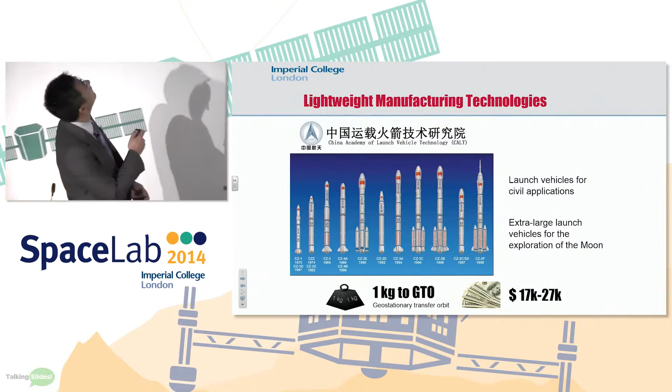Our research outputs are mainly applied to the aerospace and automotive industries. The China Academy of Launch Vehicle Technology is the biggest Chinese launch vehicle designer and manufacturer. We have had a long-term partnership with them for over 10 years.

CALT, the short name for China Academy of Launch Vehicle Technology, currently has a series of launch vehicles called the Long March series. It has 10 different models, and most of the products are used for commercial and civil applications.

As you probably know, the Chinese government has recently started a big plan to explore the moon, which means CALT has the mission to build extra-large launch vehicles. Currently, CALT's biggest launch vehicle has a diameter of 3.8 meters. For the future extra-large launch vehicle, the diameter will be over 8.5 meters.

You can imagine that from a manufacturing point of view, there will be some difficulties or issues. That's why they asked if we could help, and that's why we set up a long-term relationship.

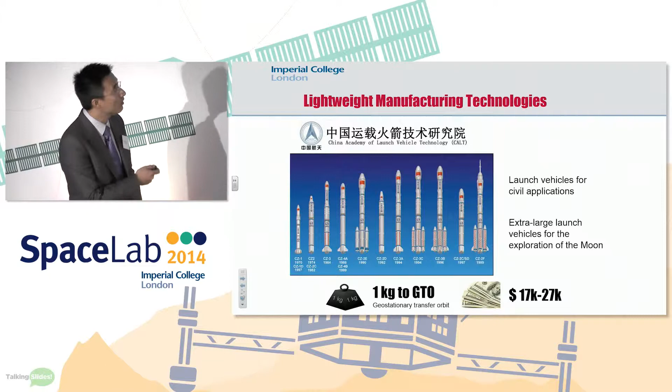In the aerospace industry, lightweighting is very important, because transferring 1 kilogram of weight into space costs about 17,000 to 27,000 US dollars, which is very expensive. From an economic point of view, lightweight manufacturing technologies will be critical for the aerospace industry.

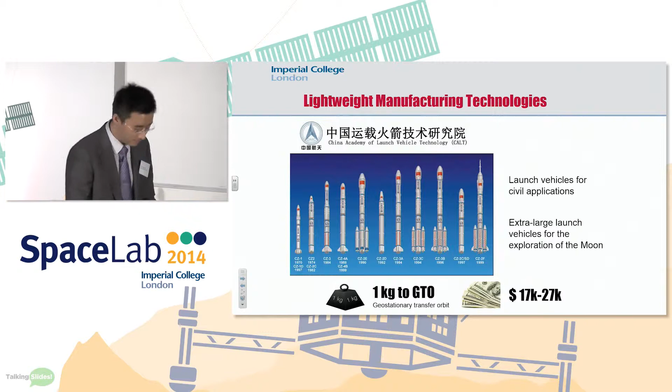Over the last 10 years, we have been working on different projects with CALT. Currently, over 50% of the structural components made by CALT are made from aluminum alloys, and the requirements for these components are lightweight, complex shape, and high strength.

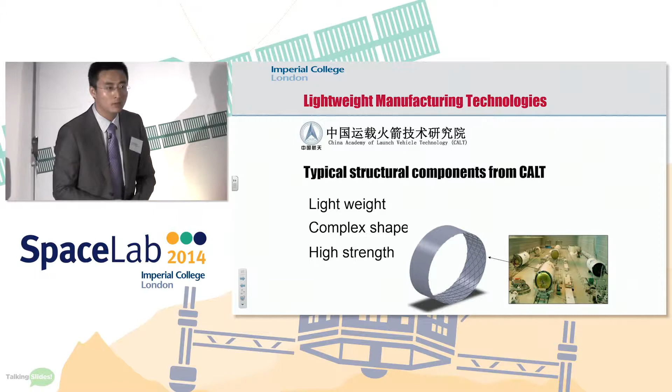We developed an advanced and novel manufacturing technology called creep age forming technology for them, now used to make the skin panels of the launch vehicle. However, this technology only uses a small, elastic deformation to make simple shaped components. If they want more complicated shaped components manufactured, we have to offer them something different.

We developed a novel forming technology called HFQ forming. So what is HFQ forming? The basic principles are shown here.

At the very beginning, we put an aluminum blank into the furnace to heat the material up to the solution heat treatment temperature. Then we transfer the material quickly from the hot furnace to a piece of cold die, which is normally water cooled.

We form the components very quickly using the cold die, and the formed component is held within the cold die for a certain period of time, normally a few seconds. Afterwards, we put the formed component into another furnace for artificial aging. By doing this, we can achieve the full strength of the material.

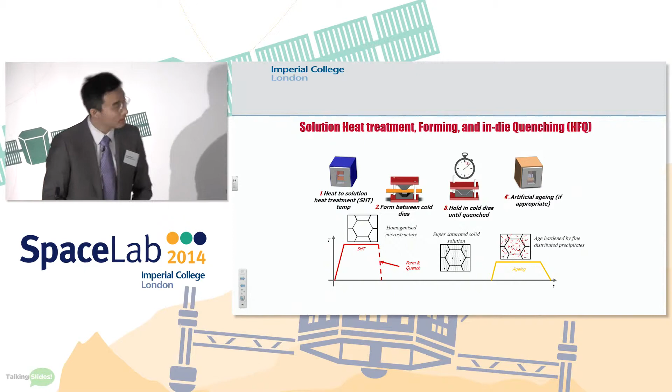This is a very novel forming technology that combines metal forming and heat treatment in one operation. Since we form the components at solution heat treatment temperature, the ductility of the material is very high, so we can form components with very complicated geometry.

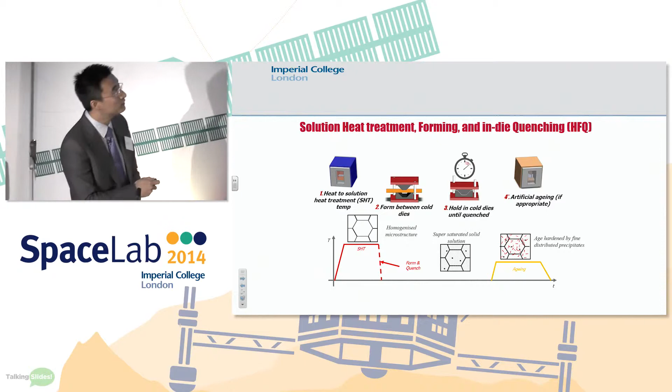Since we're quenching from the cold die, a supersaturated solid solution state is obtained after forming. After artificial aging, we can retain the full mechanical strength of the material.

This technology was invented at Imperial 10 years ago. Over the years, we have been studying it intensively, using it to form different alloys, including many different types of high-strength aluminum alloys.

This is a real component from Airbus. This component is called a wing stiffener.

Actually, it was made from CNC machining previously. They used a big block of material and used CNC machining to remove over 90% of the material away to make one component. So you can imagine the cost is very high. To make each one of these components will cost over $180.

So Airbus came to us the other day and asked if we can use a piece of sheet metal to form the components directly. This will be much cheaper. So we tried the material. They used AA2024, which is a very high-strength aluminum alloy. We used conventional metal forming technology. As expected, it failed.

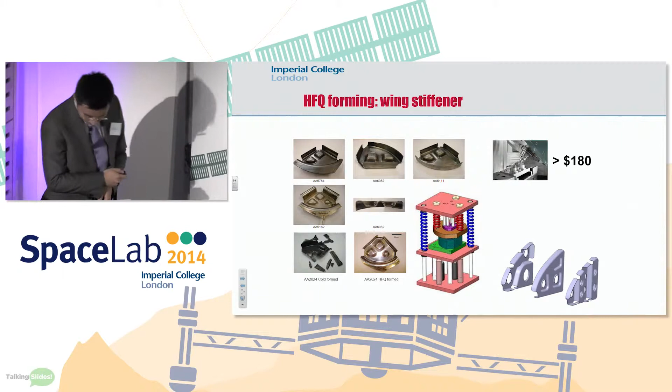And then we developed our own tool and formed it using our HFQ forming technology. It was very successful. And we tried different materials as well: 6082, 6111, 5000 series as well. They are all very successful. And in terms of cost, if we include the tooling cost as well, if we form the components using HFQ technology, the cost will be less than $10. So the cost saving is very obvious.

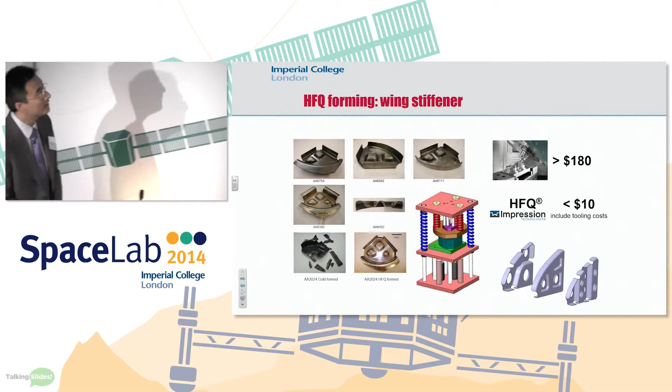We have another customer who came to us the other day asking if we can use 6000 series to form a very complicated shape, a real component. And they provided us the die, and we tried using their original material, which is in T6 condition. This is the maximum strength of this material.

And we developed our own tool in our lab, and we formed it using HFQ technology very successfully again. So the part is very complicated in shape. At room temperature, we can't form the part at all. And the repeatability of this technology has been verified.

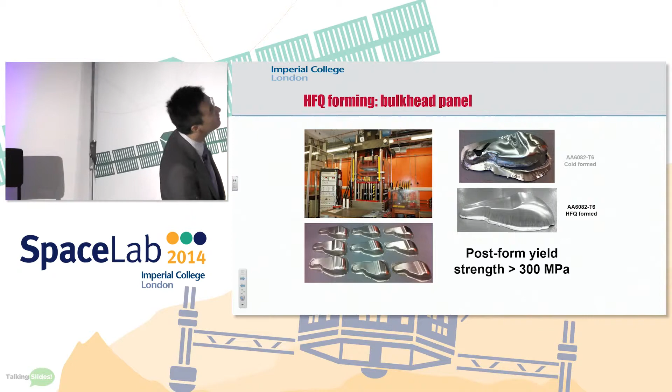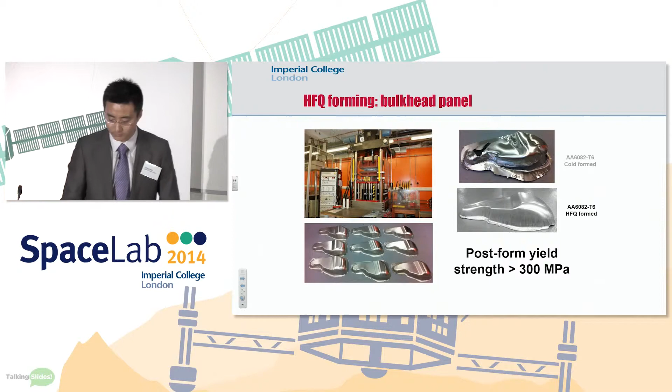This is very important, so we checked the post-form strength of our technology. We can achieve yield strength of over 300 megapascal, which is equivalent to the maximum strength of this material. This is very important for the customer because by using this kind of strength, they can save up to 50% compared to their original aluminum alloy components.

This technology cannot only be used for aluminum alloys. It can be used for magnesium alloys as well. As we probably know, magnesium alloy is probably the lightest metal which can be used to manufacture structural components. However, it's very brittle at room temperature, so it's not possible to form it that way.

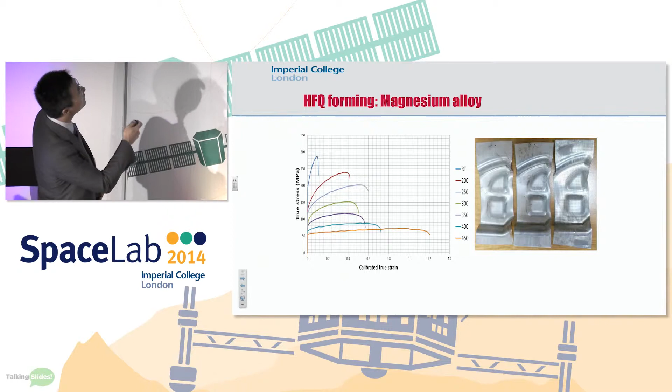At Imperial, we have the latest model of Gleeble, which is the most advanced material tester in the world. So we can simulate the complicated temperature evolution during the deformation process. Of course, we can simulate or reproduce the HFQ temperature evolution. We can see that, especially at room temperature, the ductility of the material is very, very poor. So it's not possible to form any shape by cold forming or traditional metal forming technologies. But if we look at this curve, which is the HFQ forming condition, the ductility has increased significantly. So we use this forming condition to form the part very successfully.

All the previous results introduced by myself were realized at lab scale. What if we apply this technology in an industrial production line? What will happen?

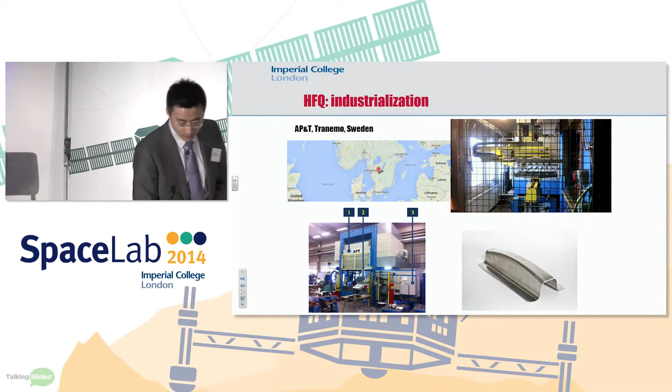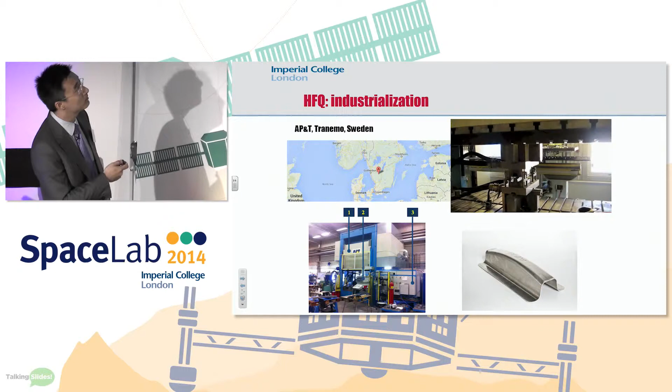Actually, a few years ago, we went to Sweden, to AP&T, and we realized our technology in a real existing production line. This video shows a speed feeder taking the specimen out of a furnace and putting it onto the die, forming it very quickly, and holding it within the cold die for a few seconds, and the part was formed very successfully.

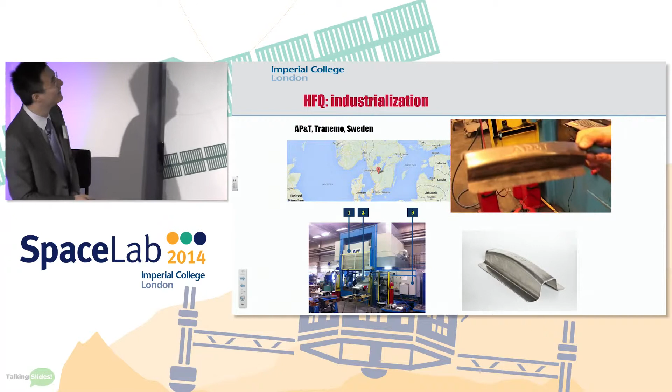They put a very nice logo here, AP&T. And this is the production line, a small-scale production line of AP&T.

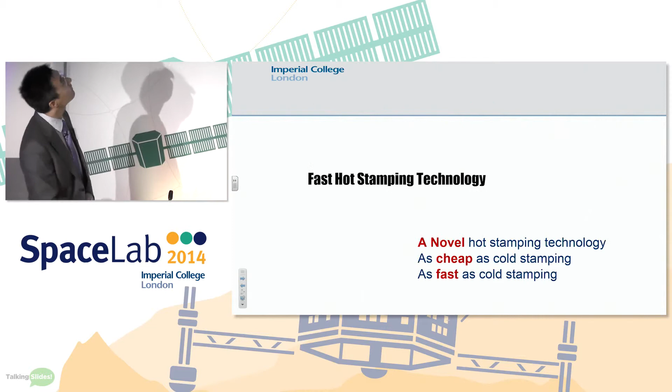We offered them another technology, called fast hot stamping technology. This novel technology will be as cheap as the cold stamping of aluminum alloy, and as fast as cold stamping of aluminum alloy. So the basic principle is that we are working in this area, which is the metal forming area.

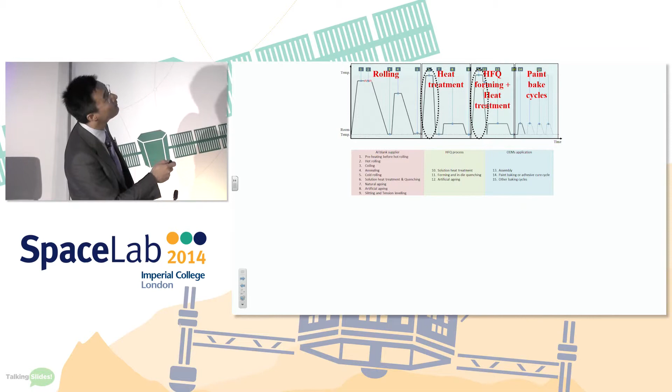The aluminum blanks are normally provided by the material producer by hot rolling. At very high temperature, they roll the aluminum ingot into a sheet blank. If the material has very poor ductility, an annealing process will take place. After that, they will solution heat treat the material, and artificial aging will take place, and then we can purchase the material in T6 or T4 condition. Then we conduct HFQ forming, and after HFQ forming, we conduct the artificial aging. Then the components will be supplied to OEMs, for example, the aerospace industry.

That's the normal procedure. As you can see here, we have two solution heat treatment procedures and two artificial aging procedures, which is a waste of money and time. That's because currently in the market we can only buy the material in T4 or T6 conditions.

Recently we have convinced the material supplier to provide us the material in the as-rolled condition, so they don't have to put heat treatment into their material production line. So we just use the material in the as-rolled state for HFQ forming.

Also here, we use some dedicated equipment to determine the key forming parameters of this new forming process. We determined the critical cooling rate, critical cooling temperature, and the critical soaking time. These are the three key forming parameters in this technology.

By using this, we can realize that the artificial aging process will be totally removed from this technology. So we will save money, and the raw material cost will be very low because they don't need to do the solution heat treatment and artificial aging, etc. We realized this idea again at APT.

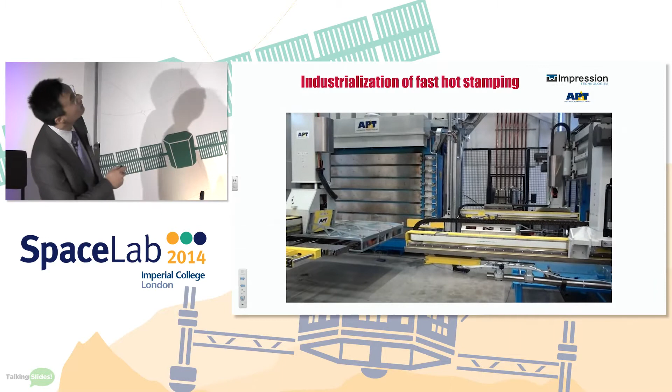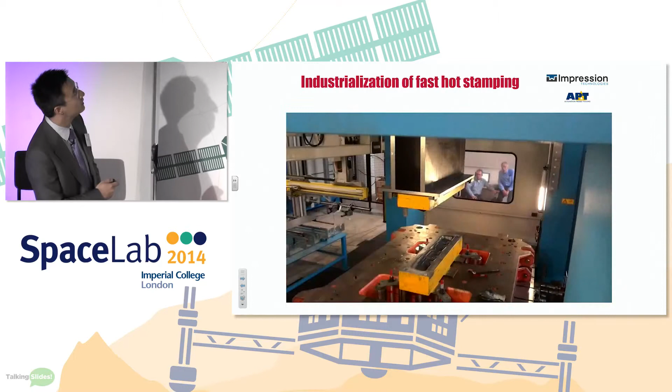This is their latest model of the furnace, which is a multi-layer furnace that can be controlled independently. The hot blank was brought out by the speed feeder, put into the cold die, and formed very quickly. So the part can be formed very successfully.

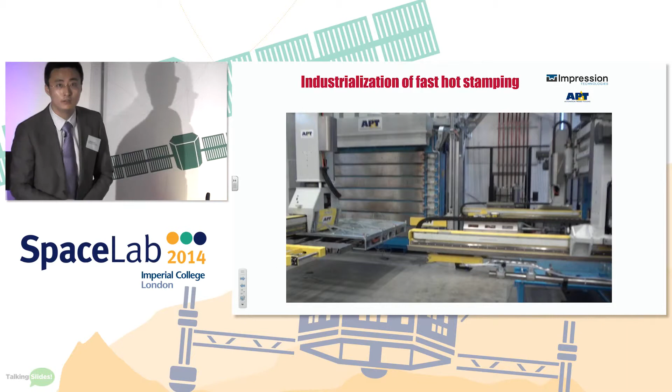There are some primary benefits for the aerospace industry. For example, we can meet their requirement for lightweight, complex shape, and high strength. And also, for this technology, we have some secondary benefits, including low cost, high productivity, no natural aging effect at room temperature, and secondary feasibility for the fabrications.

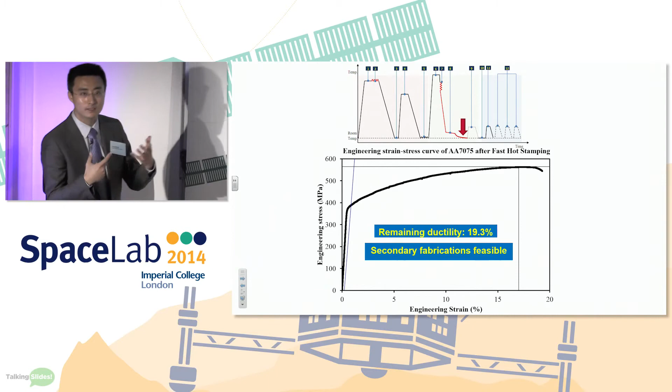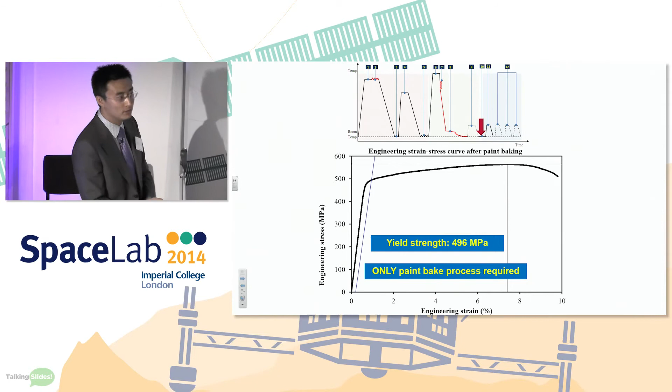Immediately after fast hot stamping, we can see this is the tensile strain stress curve. The part is very ductile - the remaining ductility is about 20%, which means you can conduct something like hemming, bending, or self-piercing. That's possible. After the aging process, we can achieve nearly 500 megapascal in the component. So it's very strong, and we don't need an extra artificial aging process.

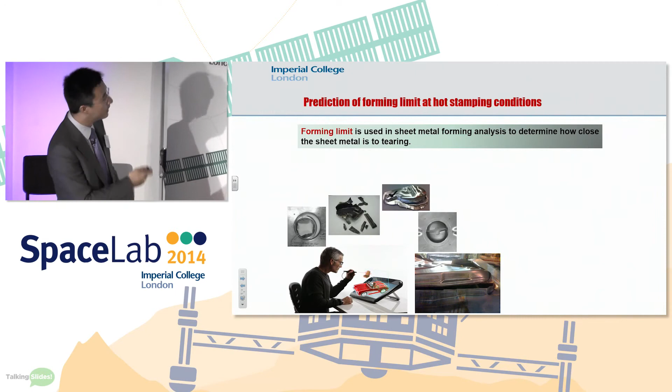This is a new forming technology, so for the designers it's very difficult, because previously they established knowledge to design the components. They know exactly how much deformation can be achieved in the conventional forming technology. But when we introduce the new forming technology, they get confused. They don't know how to design the components, or how complicated a shape they can achieve using this technology. So they need knowledge from us.

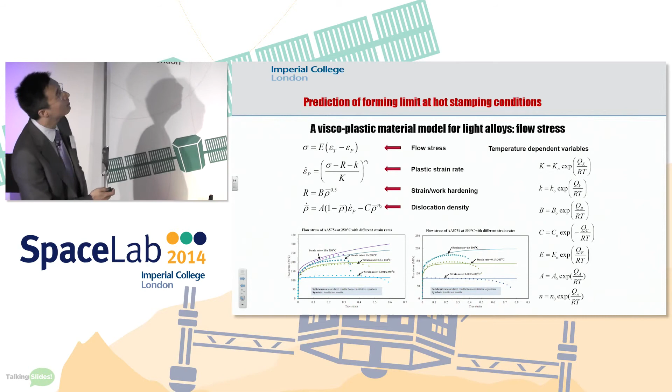We developed advanced material models to capture the flow stress evolution at different temperatures and different strain rates. The material models are very accurate, and we also developed our own forming limit prediction model to predict the failure of the component. This simulation result shows a very complicated aluminum component formed using our technology - this is a door inner.

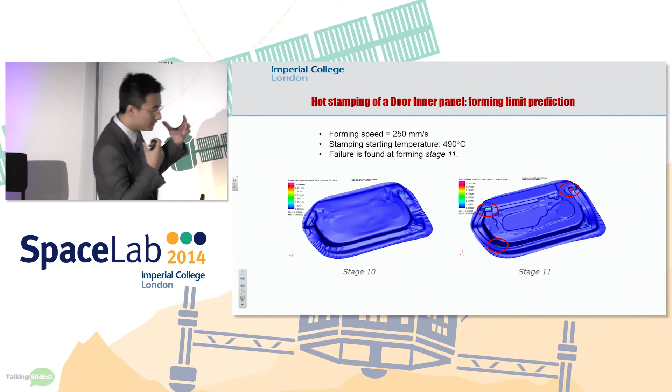Also, by using our model, we can predict the failure. So if you have an idea to design the component, we can tell you how much deformation can be achieved by our technology. Okay, I'll stop here.